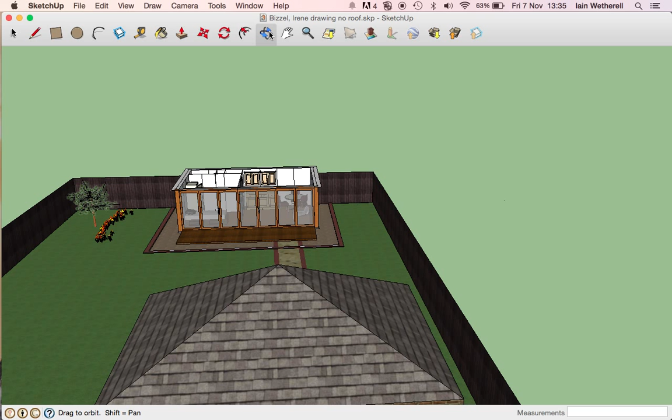I'm sitting here with Alex. We're just looking at an early drawing of Irene Bizzel's Granny Annexe, which, if you've been following, you probably already know about. But I've got Alex sitting next to me here, and I was going to ask him, Alex, what happened about the drainage? Because it's a fair old distance from the house to the studio, so how did you get water up there, and how do you get rid of all the waste from the toilet and the shower and your

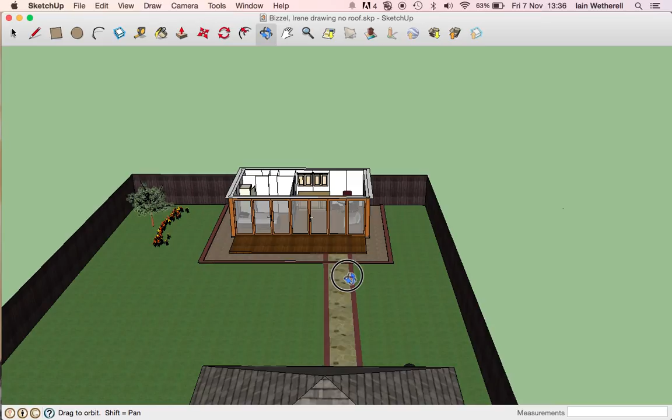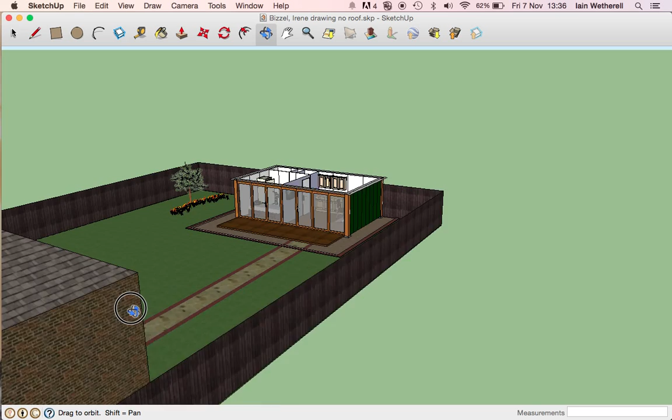sinks? One of the difficulties that we had was the studio is lower than the house. Not massively, but enough to know that we couldn't get a gravity-fed waste system in. So what we had to do... So what you're saying then, in an ideal world, would that have been slightly higher? Slightly higher, yeah. Although you can't see it and it's not much of a slope, it probably slopes down about, I don't know, 16, 17 inches from the house to the studio.

So then we've got a manhole just... Well, yeah, Jamie drew that in. Is that a manhole then? Yeah, so you've got a manhole right there that then linked into the main drains at the front of the house. Okay. So the manhole, excuse my ignorance here, but a manhole is what? Is that for getting rid of wastewater?

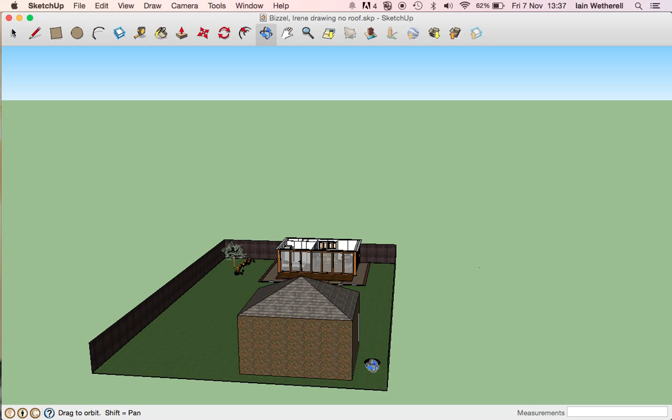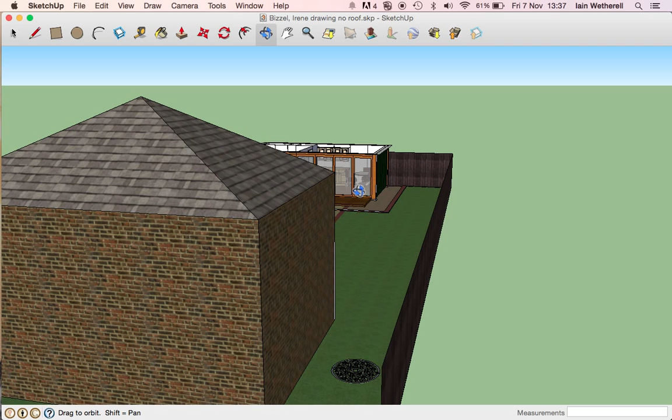Well, it's just an inspection. If you imagine that there's a pipe running along, wherever there's a bend or wherever you want to access the pipe, because it would block. It's only a 100 mil pipe. It can block, so you want to be able to access it at as many points as you can. So we tapped into that, but because it was above the entrance of the studio, what we did was we put in a pump station.

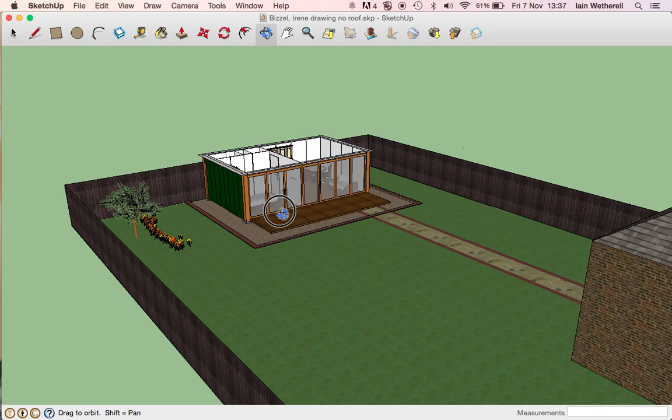Oh, right, a pump station. We've discussed them before, haven't we? So the pump station cost about £700, and then we ran... And whereabouts did that go? Sort of to the left or the right? To the left of the studio as you face the studio. And you can't see that in the photographs, though, can you? No. So where did you put it? Down here? Yeah, there's a tank below the studio. Right. There's an access lid that's available. I think Irene's got a plant on it.

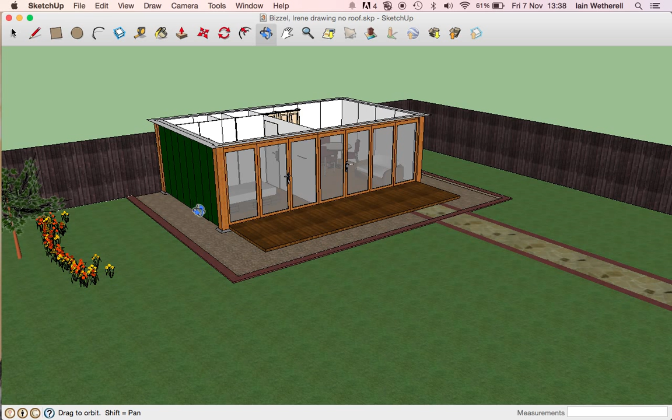So when Irene has a shower, the wastewater goes down into this little tank. Yeah. And then when it gets to a certain level, a pump kicks in. Yeah. And where does it go? Where you're going there. Follow that all the way back to that manhole. So it more or less just goes straight across the ground to the manhole. Yeah. Over there. Okay, so more or less direct route.

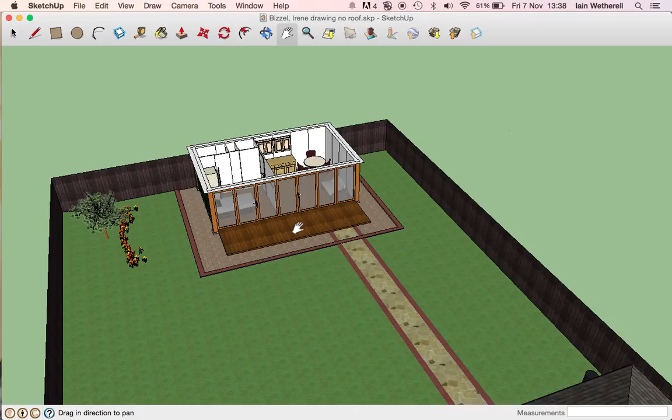And we used a 63 mil alkathene pipe. All right. So it's a more flexible pipe than 110 mil pipe. So as soon as it fills up, bang! If you were standing next to it, you would hear it shoot on, and within seconds, the tank is totally emptied. Okay. So that's that solved then. That's all the waste from her sink in the kitchen, and toilet, and the sink here, and the shower in here. All goes in that little tank, and it goes there.

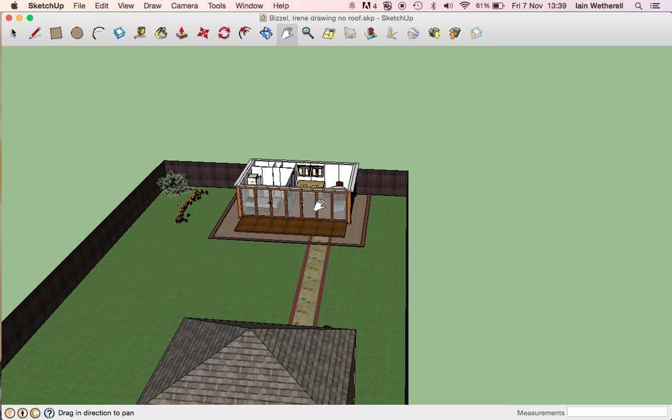Okay, that's great. And that doesn't explain how you got water to the studio. Well, the water's relatively simple because that works on pressure, so that can go uphill. In the same trench that we put the pipe in for the waste, we put in a 20 mil alkathene pipe, and then we connected that in the house.

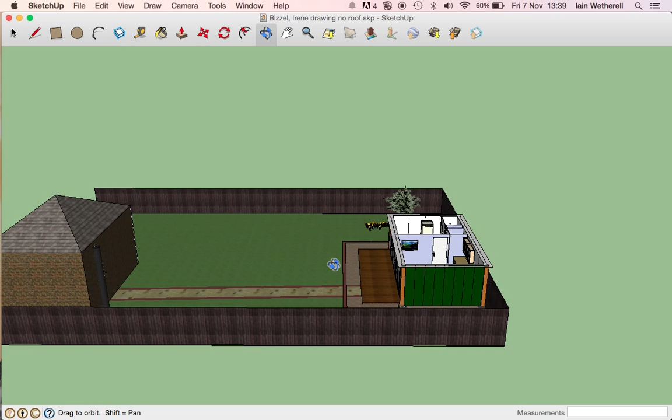So where in your house did you connect to? There's a bathroom on the back of my house as well, on the ground floor. There's a bathroom somewhere here. Yeah. So you've got a pipe coming from that bathroom, and again, it must go underground, presumably. Yeah. And then did it follow the same trench? It did. And into that same trench we put the electrical cable, which was, in this case, a 20 mil...

Armoured cable, 20 mil. Well, it's 2.5 mil armoured cable we put down to it. Right. And we put a Cat 5... Not Cat 5, it's Cat 6 now. Cat 6 armoured cable, so that Irene's got the internet down there. And did you run a TV as well, coax? Yes, we ran a coax cable that we run from the Sky Dish.

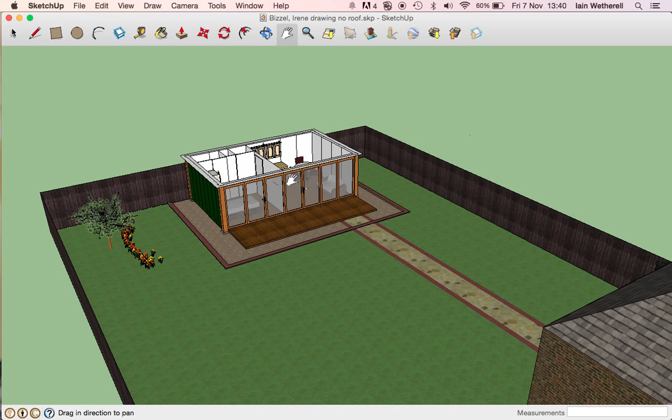She just gets all the Freeview TV. She could, if she chose to, have Sky. You know, the Sky Dish is on the house, actually. She could have access to that if she chose to get the box. It wouldn't be that difficult to do, but she's not that fussed about watching. So really, it's fairly straightforward then.

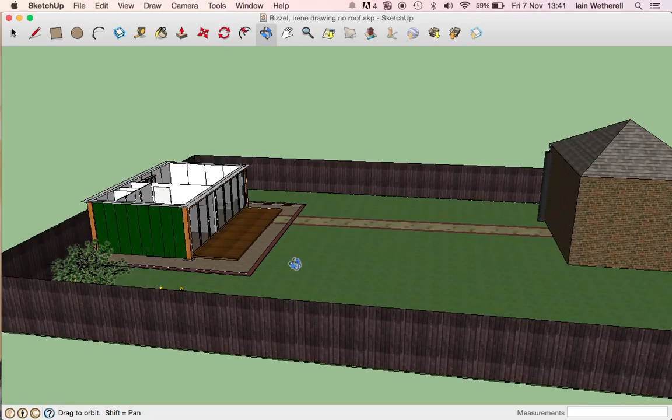It's basically a trench from your house to this side of the studio, and that's sorted all your connections out. Groundworks are simple, they're just hard work. Physically hard work. Experience helps, because any man can dig a hole, but you get a proper groundworks team in, they'll take care of the lawn. They'll replace everything back to as good as it was before they started.

You have got to be careful. You can't just dig a hole and leave that soil there for a couple of weeks. Speed is quite important. Because you can dig across a lawn, compact it back down, and within days it'll be rerooted and back to the way it was.

But I do always remember you telling me once, when you were doing this for a customer many years ago, that in the process of digging your trench you came across a double bed that somebody had buried in their garden. So if you're trying to get cables and pipes through, it's not ideal, is it? We had disc cutters and we ground a lot of the bed away, but it just adds work. When you're costing a job, it's difficult unless you've got X-ray vision, because you're just not ever sure exactly what's under there.

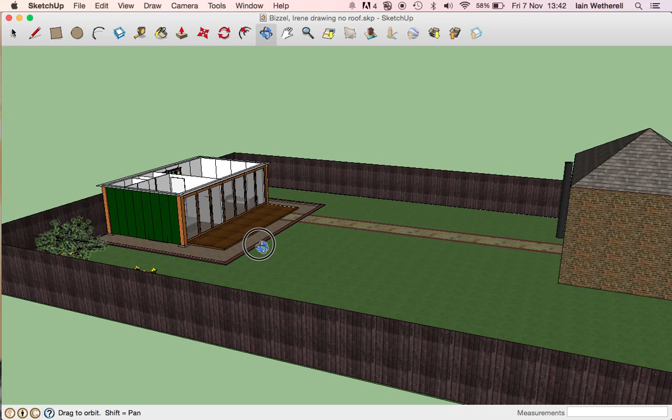I came across a big lump of concrete when I was digging in my garden. We had to dig it out. We still weren't quite sure why it was there. It was to hold some sort of post up, maybe from a previous garden design, but it was right in the way we wanted to go, and we had to dig it up and get rid of it. But that is always the worry. If you're digging in soft soil, it's easy to give a price, but you just don't know what's under the ground.

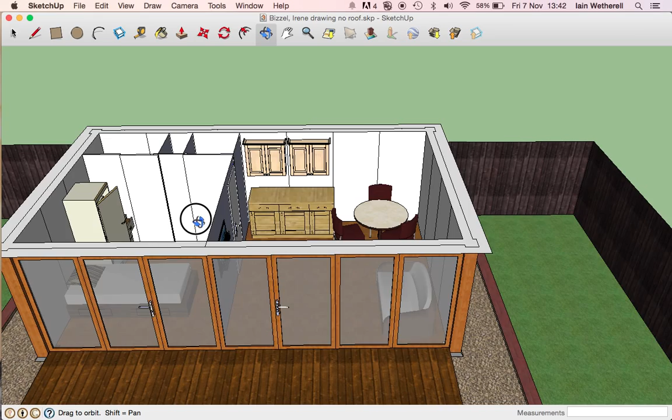And when it went to that tank below the studio, do the connections come up through this boiler cupboard? Yes, all your connections come in there. Your consumer unit's in there, that's your fuse box, where we bring in your electric, which then feeds all the studio. Your wastewater comes up in there, your water, and even your internet. So that cupboard is really important. That's the access point for everything to come into your studio.

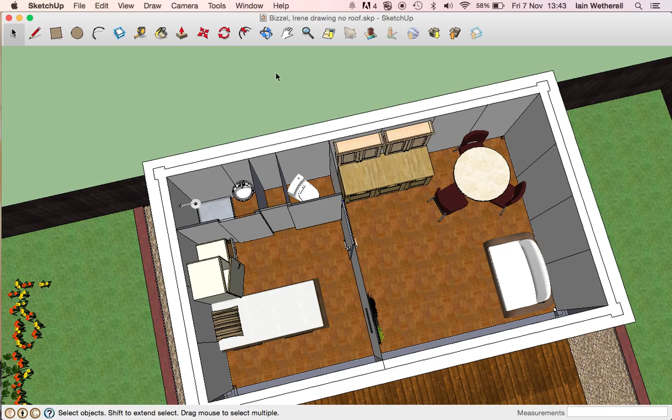Okay. Well, that's great. That's clarified that for me, and hopefully it's clarified that for whoever's listening.